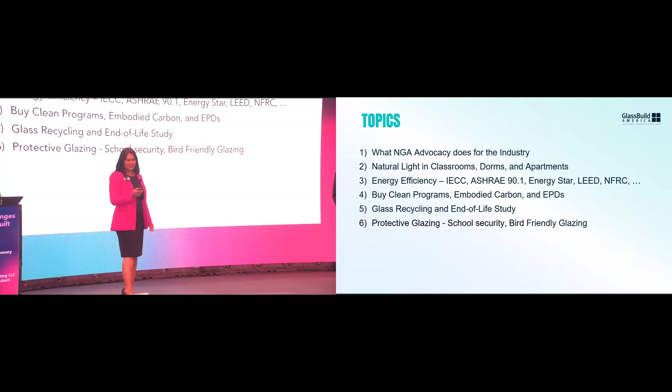I'm going to go over what NGA advocacy does for the industry. We're going to have Tom talk about natural lighting, classrooms, dorms and apartments, energy efficiency as it relates to the I-codes and all the different standards, buy clean programs, embodied carbon, EPDs. I'm going to have an action item for you all, so make sure you have your phones ready. We'll talk about glass recycling and end-of-life study, and then protective glazing and school security, bird-friendly glazing, and things like that. Then of course we'll talk about some big wins on daylighting as well as bird-friendly glazing.

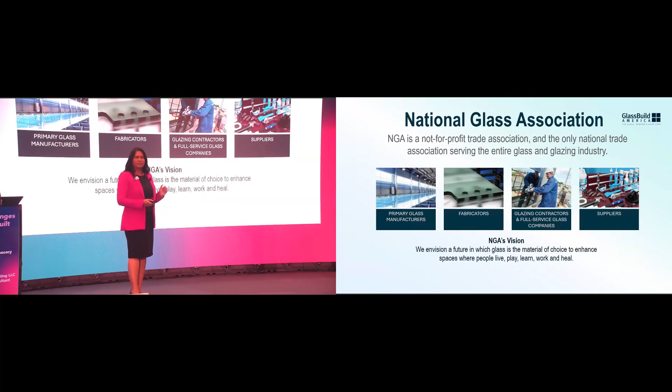So what does NGA advocacy do for the industry? First of all, National Glass Association—we're not just here for GlassBuild. We have a whole bunch of other things that we do all the time. We have the glass conferences, and we are about 1,900 member companies: primary flat glass manufacturers, fabricators, glazing contractors, installers, and suppliers. So our membership actually covers the entire supply chain. I like our vision statement: we envision a future in which glass is the material of choice to enhance spaces where we live, play, learn, work, and heal.

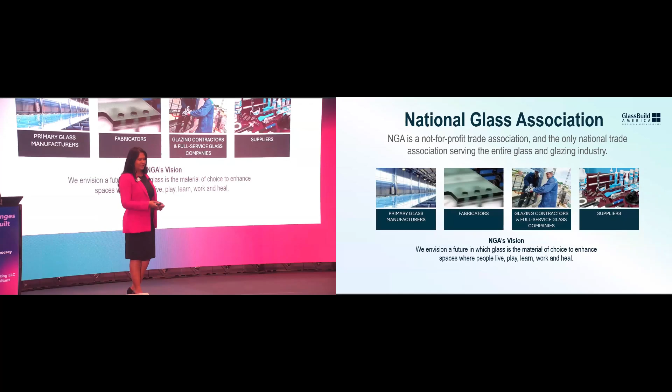So glass is being asked to do so much more than just protect us from the outside. Glass is there for us where it comes to security, hurricane, energy, flood, birds, bird-friendly, turtle-friendly, fire, acoustics, views, daylighting, recyclability, reusability, decorative, and of course safety. And then there's different types of glass. We have clear, tinted, laminated, vacuum. There's so many, of course you all know all of this.

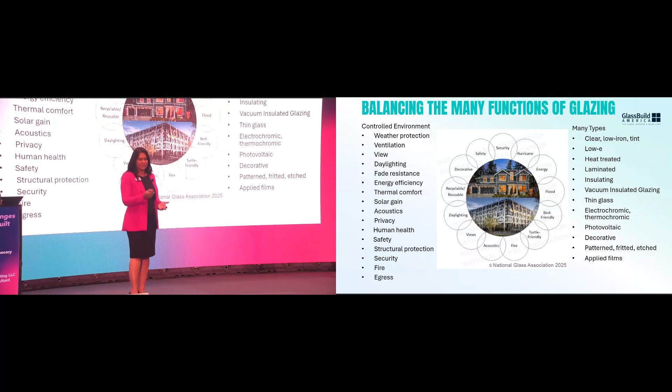But for us on the advocacy team it's like, how do we keep glass in buildings? Because we have a really amazing product, multifunctional at that too. So this is what NGA does. From the advocacy team, if there's a building code, a standard, certification body, association or organization, regulation or legislation that impacts or touches glass, we make sure we're trying to be involved. We make sure that we have a voice at the table, so that way we can ensure that we have a future for glass. We do so globally.

So I'm personally involved in the international standards organization, the ISO codes for glass and glazing, ASTM. Tom Culp is heavily involved in a lot of the energy side of things as well. So a lot of stuff going on all over the time.

221 years in our expertise in the glass and glazing industry. So it's not just like we're just here for today and then we're gone off to something else. We've been in the industry for quite some time and we want to make sure that we protect the industry for quite some time.

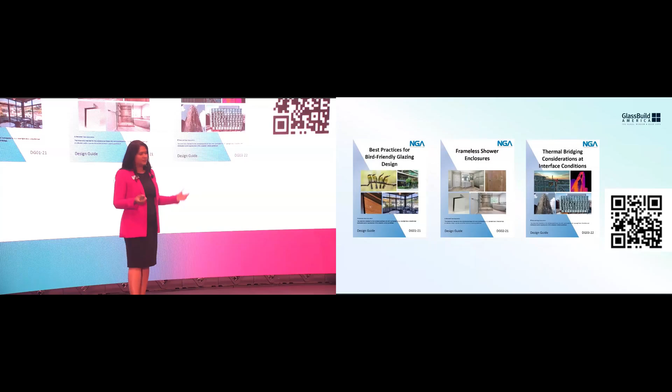We also have AIA presentations on there. If you are an AIA provider, we have the presentation with the speaker notes. We give it to you, you can take it as your own, because when you're speaking with architects, one of the things they don't necessarily want is you pushing your own company material. They would like something that's neutral. These are presentations that you can use.

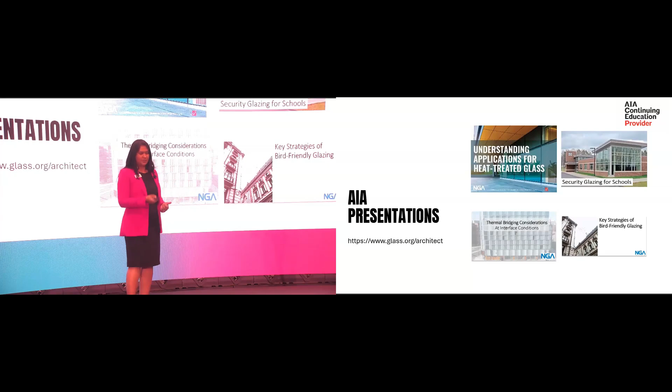We also have AIA credits for architectural record. We have an academy there that has many different presentations if architects need those as well.

And so then we also do a lot of advocacy. Glass and Glazing Advocacy Days, where we go to Capitol Hill. We talk about what we can do legislatively to help with glass. How do we keep glass in buildings legislatively? Whether that be energy efficiency, credits for different types of newer products, protective glazing, or school security and things like that. That's also something we have worked on.

On our website, lots of different webinars. This is actually going to be one of the webinars on there in about a month or so. We have quite a bit of them every third Thursday of every month. We either have residential trends that we talk about, quench your thirst for knowledge kind of technical talks, and of course the technical know-how on things like that.

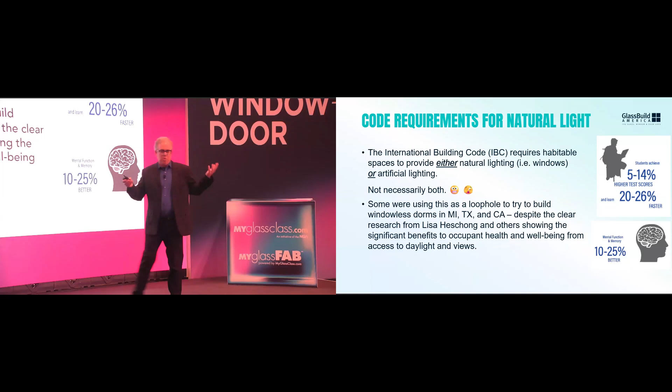The next thing we'll talk about is natural light in classrooms, dorms, residences, and apartments. So what are the code requirements for natural light? In the building code, the IBC, the International Building Code, which is used by all the states in the country as well as Canada and a number of other places, there's a provision that requires habitable spaces to provide either natural lighting, windows, or artificial lighting. But that's an either-or, not necessarily both, which is a little weird because in most cases you're going to have both. You need lighting at nighttime, wintertime, but you still want to have windows in there too.

But some were using this as a loophole. It doesn't say you have to have both, and so there was a loophole. You may have read about this in a lot of the trade press. There were people trying to build windowless dorms in Michigan, Texas, California. Munger Hall was one that was talked about in California. And think about that - that's just horrible, to have your kid trying to live, learn, work, grow as an adult in a space like that. Yet they were trying to do it.

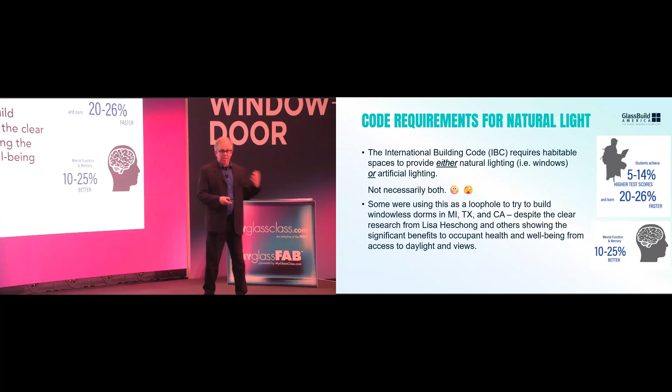And this is despite a lot of clear research. A partner of ours is Lisa Heschong, an academic who works on the importance of daylighting and view. She's done a bunch of seminal research showing that when you have access to light and view, students do better - they learn faster, they're healthier, they're more productive. So many clear benefits that we also highlighted in the last talk.

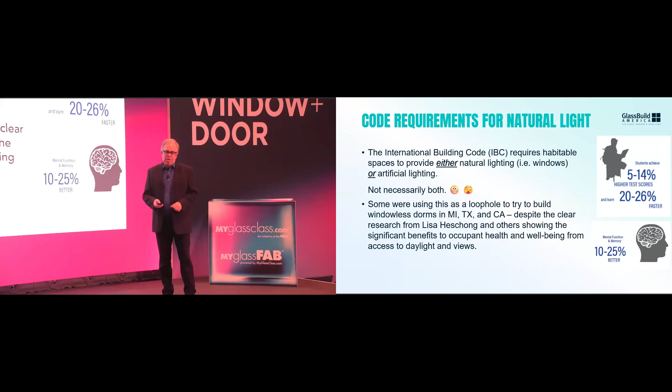So what we tried to do is through GICC, Glazing Industry Code Committee, an arm of NGA that addresses the codes, together with the Aluminum Extruders Council, we partnered and submitted a proposal that said no, we've got to stop this loophole, this is bad practice. Let's put in a requirement that makes it very clear in the code that you must provide both natural light and artificial light - electrical lighting in classrooms was our focus - as part of this concept that there's a basic right to light, as Lisa and others talk about it.

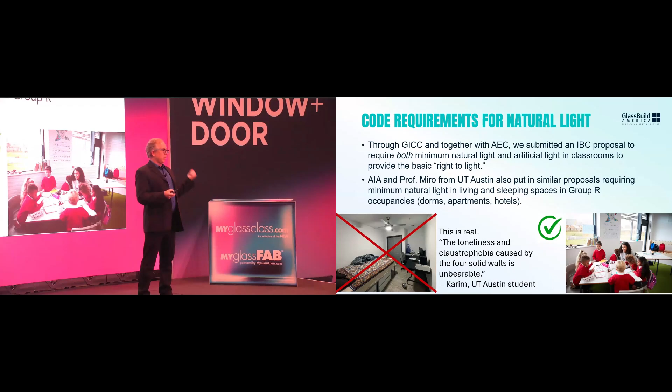We started working together with AIA, as well as Professor Miro, who's in architecture at UT Austin. They put in similar proposals doing the same thing for living and sleeping spaces and group R occupancies, which is dorms, as well as apartments and hotels.

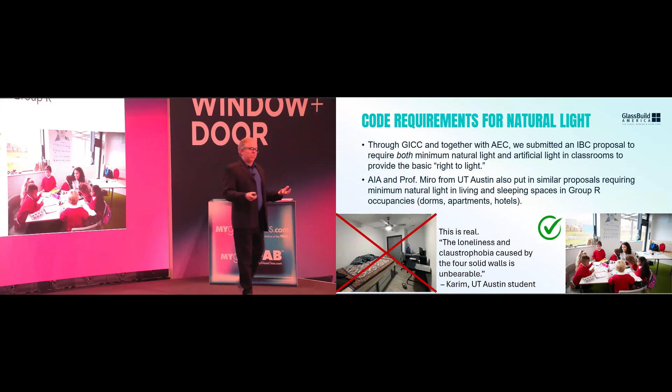The pictures speak 1,000 words. This is a real picture from Professor Miro of a dorm in UT Austin. Can you imagine? The quote says a lot, so I'm going to read it: the loneliness and claustrophobia caused by the 4 solid walls is unbearable. I can imagine that - that's the student living in that room. That's horrible. I have 2 kids, sophomores in college right now. I can't imagine, they're already under enough stress. To live in a space like that - horrible.

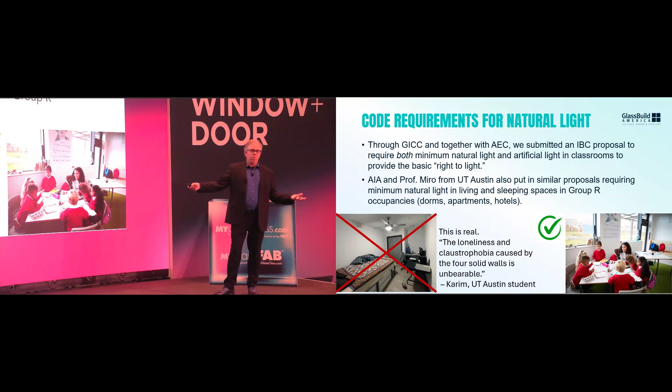So on the flip side, you can just visually see - this is an elementary school classroom, but it would be true of other classrooms all the way through higher education as well as dorm rooms. There is clearly a benefit there.

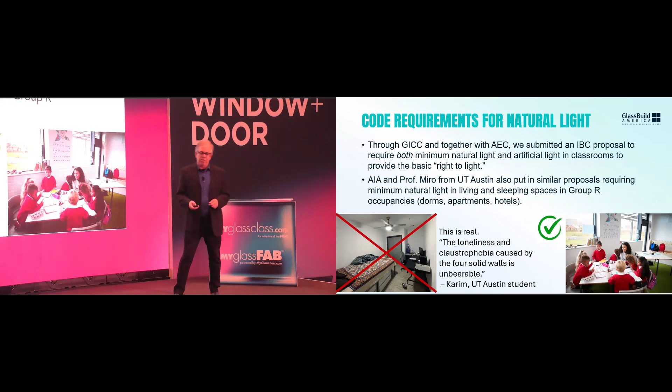So that's the big announcement - hopefully you already saw this on LinkedIn, we tried to make a big deal out of it, spread the word. We had a big win, a very big win for healthy buildings and students. Together, NGA, AEC, AIA, and Professor Miro successfully passed 2 proposals at the ICC Code Committee hearings on October 24th, just like a week and a half ago, to require natural light in schools, specifically in classrooms, dormitories, and apartments. So that's a big win.

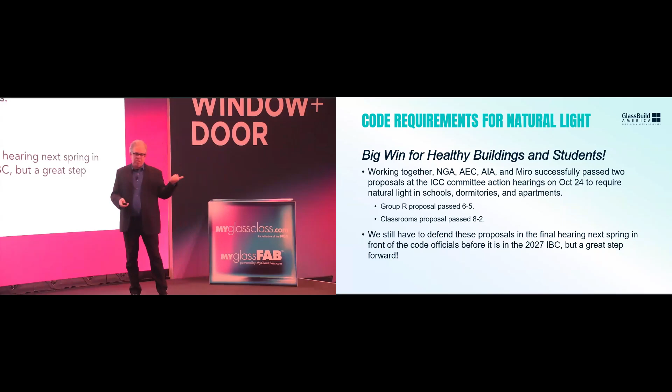Next topic - I'm going to jump into the other area I cover, which is energy efficiency. So this is things like IECC, ASHRAE 90.1, Energy Star, NFRC. We'll talk about what's going on in the world of energy efficiency.

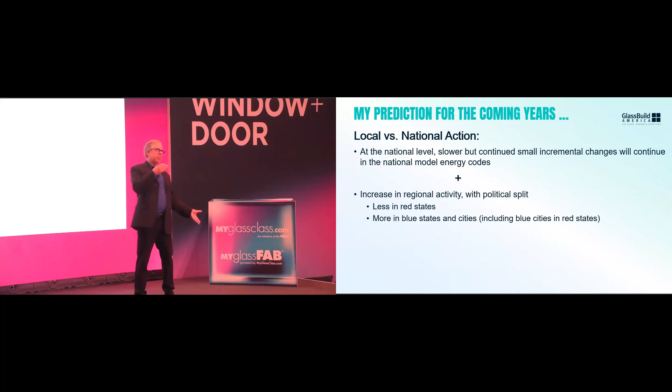I've been asked a lot, like, what's your prediction? We're living in a little bit of a chaotic world right now. What's happening? We have a different administration that views things very differently than the prior administration. What does that mean? I talked about this at BEC a little bit for those who were there, but I keep being asked about this, so I want to repeat a little bit.

What I see happening is you're going to see a difference in local versus national action. At the national level, we know, and we've seen already, there's going to be a slower but continual progression - things are not stopping completely, despite the current shutdown. But at the national level, we're going to see slow but continued small incremental changes in the model energy codes, and I'll talk a little bit about that.

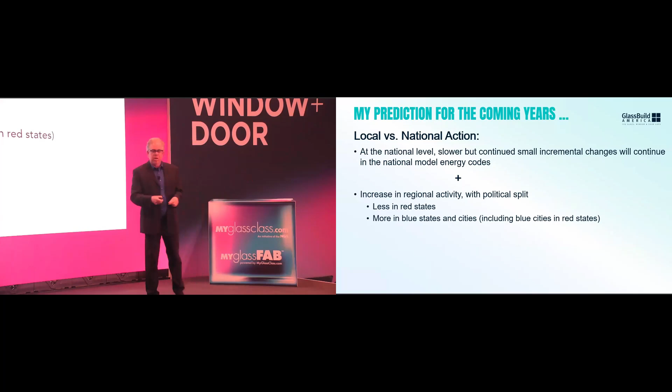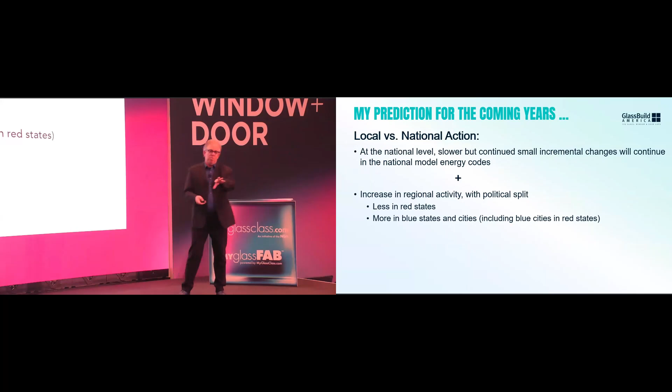But then the new part is, I think we're going to see this slowdown at the national level cause an increase in regional activity. We saw this last time in the 2016 to 2020 range, and I think we're going to see the same thing here. This is the one place I'm not political - NGA is not political - but this is one place where we will see a political split. We'll probably see less activity in red states, more in blue states, but also blue activity at the local level in blue cities in red states - Atlanta being an example, Austin, Dallas, places like that. So I'll give you some examples of what we see happening out there.

From a high level, what does this mean? It creates both opportunities and threats. We have to watch for attacks on window area in any of our codes - we always do that. But also, some of these local activities are creating new opportunities for high performance products. Vacuum glazing is becoming more mature - it's been there for a long time, but now it's expanding, becoming more widespread. Triple glazing, fourth surface low E, advanced spacers, advanced frames - we're seeing new opportunities created for those products. So what do I mean about that national level, slow, steady progression?

This is an example of ASHRAE 90.1, the main energy standard covering commercial buildings as well as residential buildings that are 4-story and higher. This is a chart on the left showing the progression of energy consumption of buildings built to the standard over time. You want that to go down.

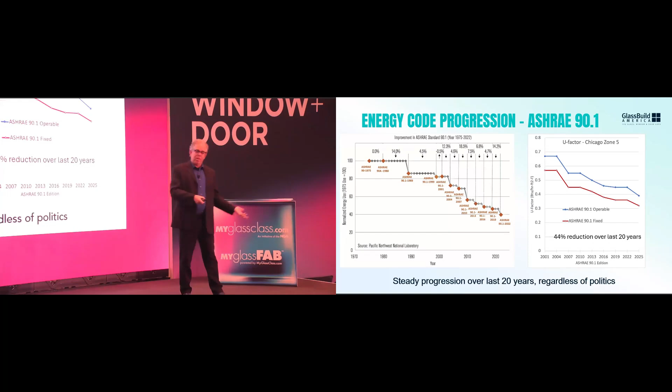This is a long time frame, going back to the 70s. From that start time to where we are today, the energy consumption of buildings built to the standard has been cut by more than half. That's a lot. Not many other industries can say they've done that much, but it's been done at a slow, steady pace, continual, and that's happened over multiple administrations, regardless of politics.

This is why I say, yes, we are all trapped in the news cycle this way and that way. I think we're going to keep seeing at the high level this slow, steady progression. Same thing is true on the windows specifically.

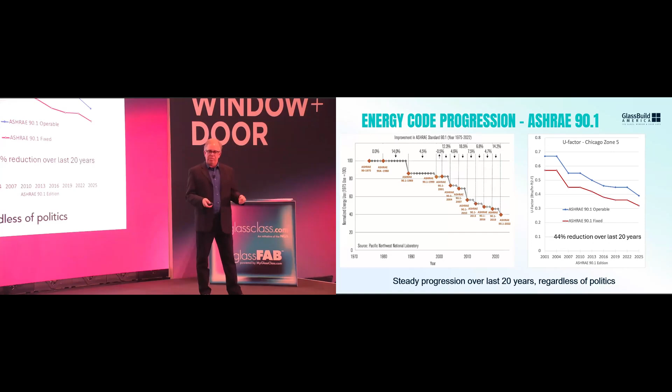The chart on the right is an example of U factors for commercial windows in Chicago Zone 5. You see over a 44% reduction in U factor over the last 20 years. But we've been able to show that it's cost effective and realistic and practical.

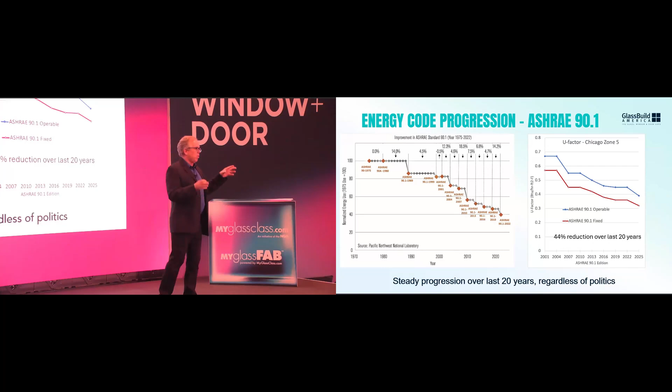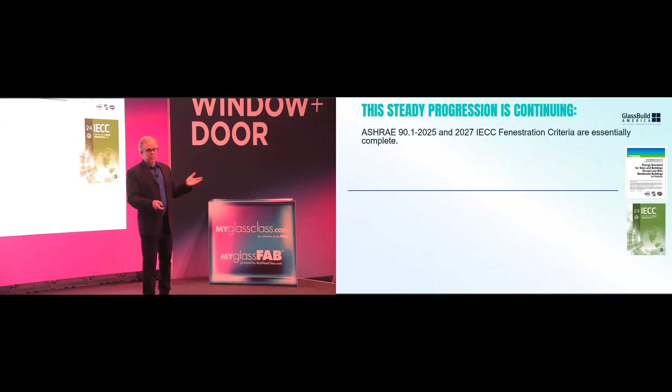Right now there are many people on the floor here showing products that meet these criteria, that maybe back in 2004 they'd say, oh, freak out a little bit, can we do that? Yes, we can do it. We are doing it. So my prediction will continue to see that at a high level, that steady progression continuing.

My world and Urmilla's world, we're already working on the future. We're working on the 2025 standard for ASHRAE 90.1, which has not been published yet, and the 2027 IECC, International Energy Conservation Code, but they're already done. The criteria are essentially already done. We worked with the committees to come up with criteria, it's a comprehensive change that's coming.

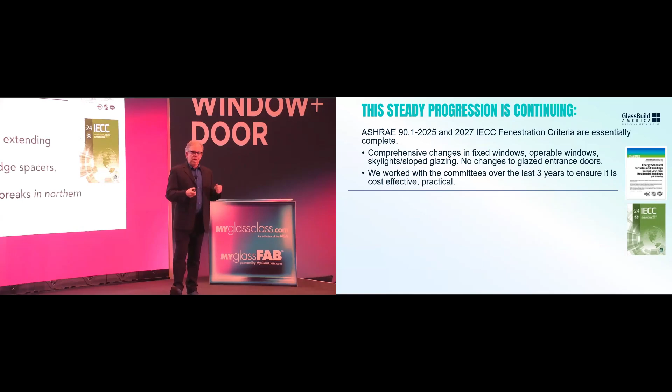I don't have the numbers for you, but contact me, I'm happy to provide them if you want to know what's coming. But to make sure they're cost-effective, practical, number one, there's no reduction in window area. We're seeing small incremental changes, like 3 to 13% in U factor. Not a big deal.

Solar heat gain is pretty much staying the same because it's already been optimized, higher in the north, lower in the south, with one exception where it's going a little lower to 0.23 solar heat gain in zone 0 through 2. That's the far south, up to about Dallas is the most north.

But we'll see more warm edge spacers, more thermally broken frames, more gas fill in all zones. In the northern zones, you're going to start to see more fourth surface low E, high performance thermal breaks. And far, far north, zone 7, 8, like northern Minnesota up into Alaska, triple glazing. But the main point is we have those products, we can do that, it's all good.

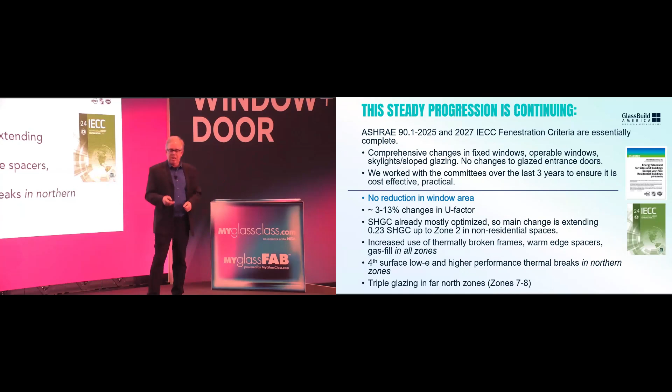A lot of words, I'll just make it very simple. There's a lot of rhetoric in the news about renewable energy. Is it going away? Is it advancing? Energy codes, it's still there.

It's increasing, which for us includes glass and PV and building integrated PV, BIPV. They've maintained and actually are increasing their renewable energy requirements embedded in some of the newer energy codes. So renewable energy from a PV standpoint will continue to increase.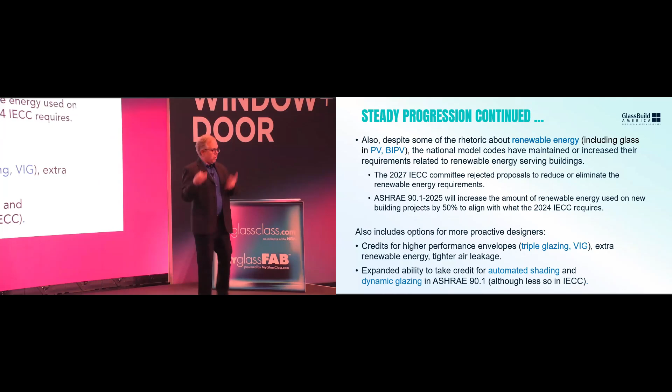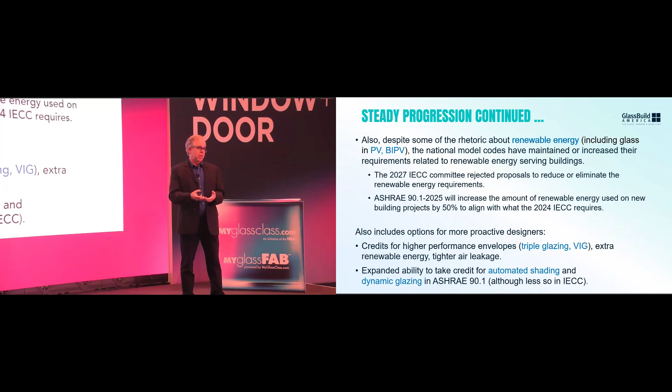There's also, for designers in the room, those who want to be more proactive and use higher performance products, you get credit for it. Both IECC and 90.1 have ways to get credit for higher performance envelopes, triple glazing, VIG, extra renewable energy, tighter air leakage, as well as new aspects allowing credit for automated shading or dynamic glazing. Let me know if you want details on any of that.

On the residential side, that's mainly dominated by the IECC, not ASHRAE. There we see the same thing. If you look in the north, going from 2021 to 2024, we pretty much have the 2027 numbers finalized, we think. It's not done yet, but there's been strong consensus around it. It's just small steps, you can see a 0.30 to a 0.28 to a 0.27 in the northern zones.

In the southern zones, some small changes in U factor, no big deal, but there is a change from 0.25 to 0.23 solar heat gain in the far south, nothing earth-shattering. So more warm edge spacers, inert gas fill, improved frames, fourth surface low E in the north. In the far south, you're going to see increased use of triple silver low E's and some of the newer triple silvers that give a little more solar control. But really nothing earth-shattering.

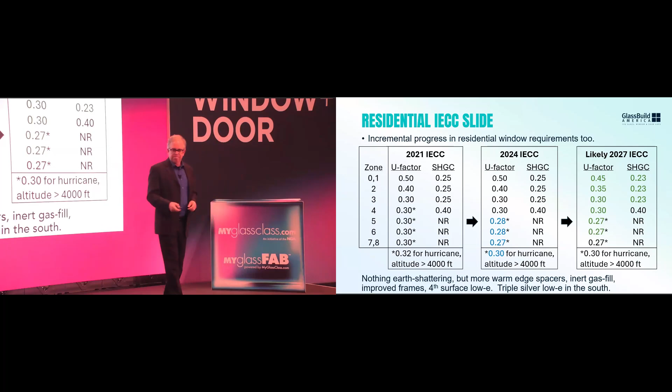What about Energy Star? Energy Star program version 7 is for residential windows, doors, and skylights, 3 stories and less, so homes and apartments. It's been in effect now for 2 years, and it's really quite aggressive, especially in the northern zone. The hope is that it's going to start to push triple glazing, surface coatings, things like that.

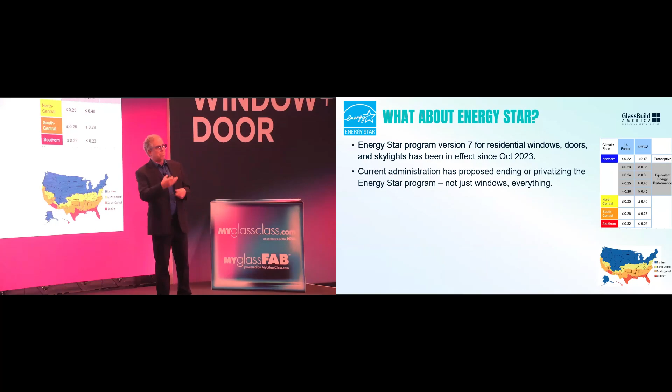But there's been a lot of news. The current administration proposed eliminating Energy Star, and not just the Windows program, but the whole thing—everything from refrigerators to thermostats to anything covered by Energy Star. They're trying to get rid of the whole program.

But the news is no. There was big pushback when that was announced, from industry, from building owners, builders, manufacturers. They said, whoa, whoa, whoa, we actually like this program. It's a public-private type thing. It's good for marketing products. Home builders use it to market Energy Star homes. Energy Star Buildings program is used for tax credits and benchmarking ordinances on the commercial side. So the overall program, they realized, okay, maybe that was a little too aggressive, and they backed off.

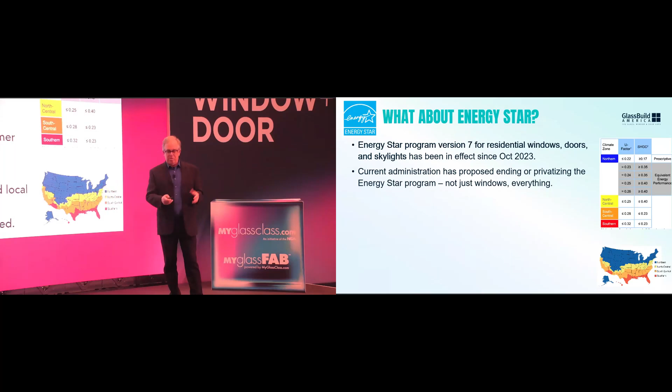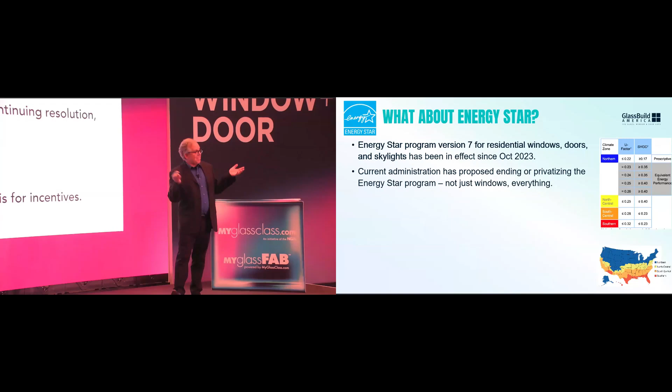Because of that pushback, both the House and the Senate Appropriations Committees have put a specific line item into their draft budgets to fully fund Energy Star. Now, of course, we got a shutdown. So what does that mean? We don't know. If no budget is approved, or if they just do a continuing resolution, it may not be canceled, but they may also not spend any money on it. So it could just sit there. It's called impoundment, which there's a big debate whether that's illegal or not.

But it's looking like it won't be canceled, so it's continuing like normal for now. Utility programs are still looking to Energy Star as a basis for incentives—Wisconsin is looking at that right now. So Energy Star is still there, but it has created a lot of confusion in the marketplace.

I just wanted to briefly mention PAWS. PAWS is a Partnership for Advanced Window Solutions. It's another public-private cooperation partnership, kind of like Energy Star. This is specifically for windows—DOE, national labs, utilities, and then industry. So I'm there along with some of our members, representing the glass industry on how to voluntarily promote the next level of performance, high performance windows.

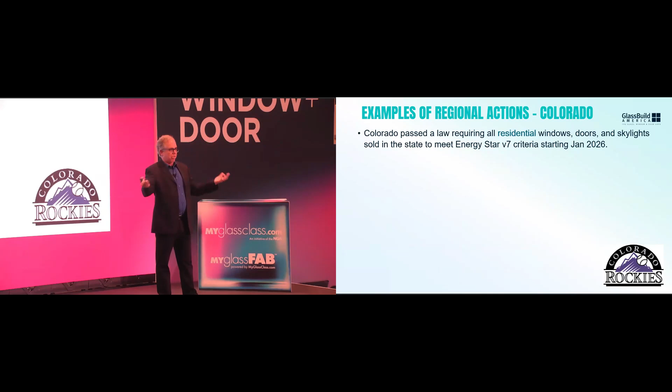One is Colorado. Colorado passed a law a little while ago that addresses all residential windows, doors, and skylights sold or offered for sale in the state—they must meet Energy Star version 7. That's a big step, putting the onus on the manufacturers, not the person occupying the home. If you violate a building code, it's the building occupant that's technically at fault—of course they'll point fingers at whoever built the home or the architect, but technically the responsibility is on the building owner. With something like this, the responsibility is on the person selling the product, whoever's selling that window. And so it really raises the level.

And there was some question.

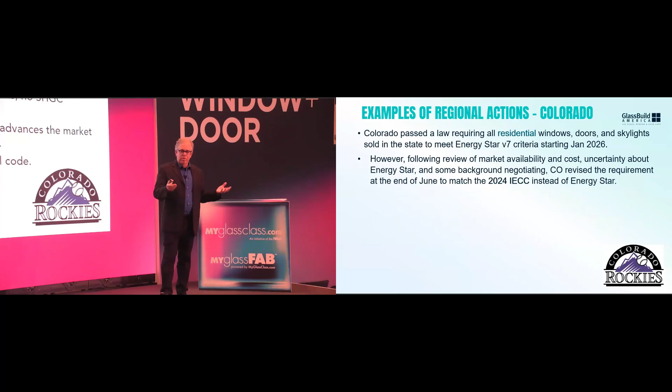Energy Star version 7 in Colorado is quite aggressive. It will really push triple glazing, but there was some pushback about affordability and cost, and confusion about Energy Star fed into it, so they backed off a little. They backed off to the 2024 IECC instead of Energy Star. It's nothing crazy, but it's still an improvement: a 0.30 U factor for windows and doors, no solar heat gain requirement in Colorado. That's the northern zone, and it's a compromise that gets more people on board.

Colorado's unique with the altitude, so there was discussion about what to do for higher altitudes - do we give an additional allowance? Right now they're just staying out of that game, with a 0.30 U factor for the entire state. But there are more and more manufacturers doing high altitude argon now. It used to be said you can't do a gas fill or argon at high altitudes, but you can, and there are companies here showing you how to do it. There are different ways - pre-equalization of the IG unit seems to be one of them. There are people here you can talk to and learn more about that.

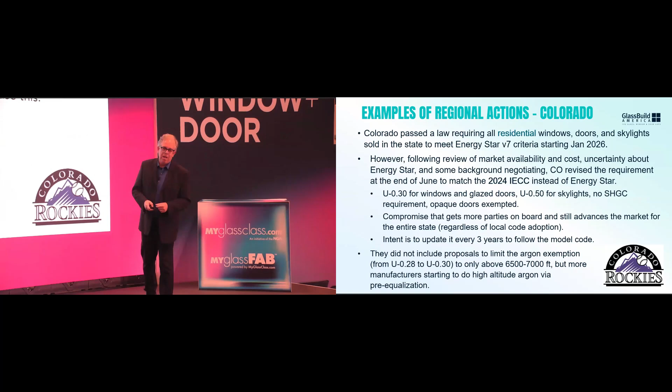Also in Colorado, they have a model low energy and carbon code. It starts July of next year. Basically it's the modern energy code, but adds on stuff about extra solar - glass going into PV, as well as electric vehicles, electrification, stuff that really doesn't involve us. But that's an example where Colorado said, all right, we're not going to wait on the federal government, we're going to move a little faster on our own.

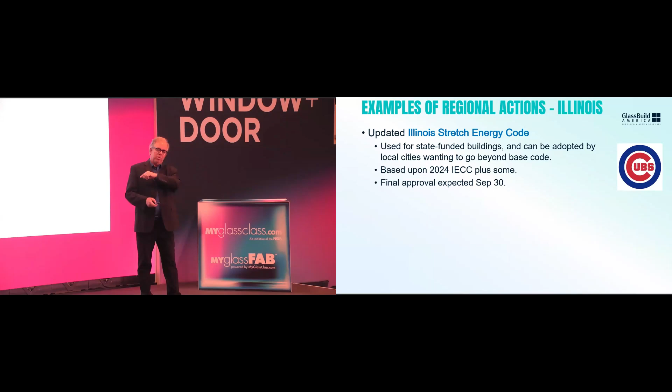Illinois just recently updated their Illinois stretch code. This is used for state-funded buildings, but local cities can adopt it as well, so that could be a small proactive town or it could be Chicago - we don't know yet, we'll see. It's based on the IECC, the most recent version, plus some. Final approval was expected September 30th, and they did do that - it has been approved.

So for commercial windows, it's a 0.28 U factor fixed, 0.32 operable. That's a notch beyond ASHRAE 90.1, so it's more advanced but still achievable and practical. It's going to push some higher performance technologies. For residential, they're looking at about a 0.27 U factor - again, very reasonable, can be done. It's just pushing the higher performance products.

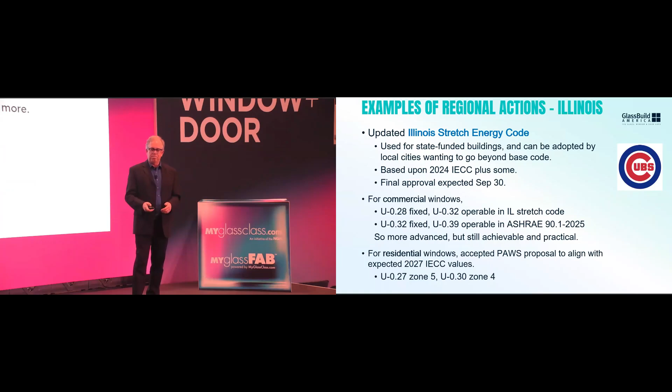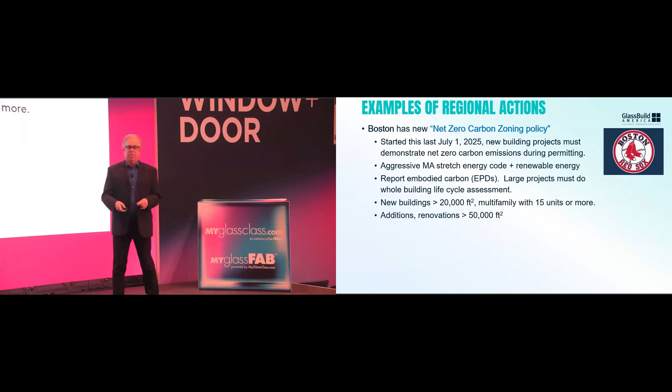Boston, going up there, has the new net zero carbon zoning policy. This started in July of this year, so it's in place now. All new building projects now have to look at carbon as well as energy, so they have to report embodied carbon, EPDs - Urmilla is going to talk a little bit about that. Large projects have to do whole building life cycle assessment, plus they have to meet a very aggressive energy code, the most aggressive in the country. There's a lot going on there that's way beyond what's happening at the national or federal level. Boston's probably one of the examples of really regional action going beyond the national level.

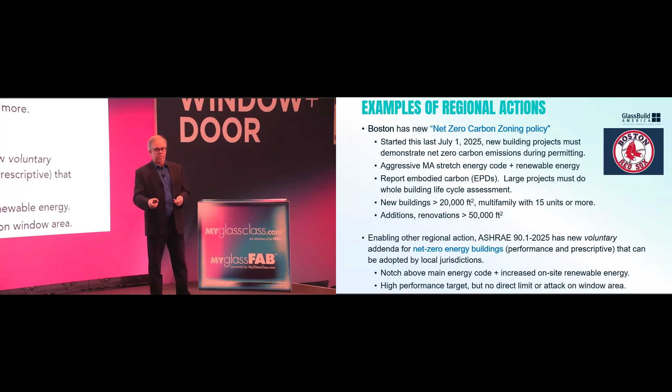And then this is not Boston, this is ASHRAE 90.1. I wanted to note that's kind of the national standard, but to help cities like Boston, they said let's try and put a little uniformity around this. So they created a net zero energy building voluntary appendix - it's voluntary, so a city like Boston, if they want to do it, can just say okay, I'm going to do it this way. It's a notch above the main energy code, uses a lot more increased on-site renewable energy. One thing we looked at was making sure they didn't attack window area - they didn't, so we made sure of that. So it's a high performance target, going to be hard to do, but it's not necessarily an attack on windows.

Now all those were examples of certain states or locations jumping ahead of what's happening at the federal or national level, wanting to be more aggressive. It can also work the other way, and you might be surprised that I have California up there. But California is taking a pause. They have a pretty good, strong energy code already, but for this upcoming cycle over the next couple of years, they said we're not going to make big changes - they're really just doing small tweaks.

We're going to do one small tweak in Windows. That's really no big deal.

Probably the bigger news is their response to what Karen spoke about regarding wildfires. After the Palisades fire decimated a lot of residential homes in California, they put a pause on what are known as reach codes. No residential communities can implement these reach codes for the next 6 years, because they want to speed development and rebuilding of those residential areas. Residential only, but it's interesting. California's taken, not a step back, but a pause, is the way I'd describe it.

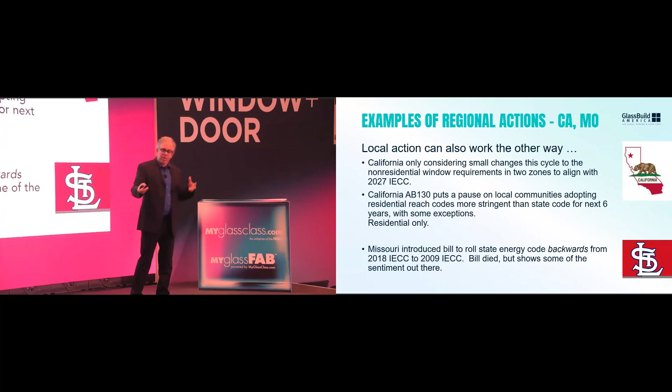Now a step back would be Missouri. Missouri introduced bills to roll the energy codes backwards, and this has never happened before. This is very rare—from the 2018 code back to the 2009 code. And that's like, what? We're going to go back to double pane clear glass, no low-E? It's silly. It looks easy on paper, but in reality, why would we do that? Ultimately they came to their senses and the bill died, it didn't go anywhere. But I wanted to use that as an example that this sentiment of regional activity can go both directions. So there is some sentiment out there.

Last thing before I hand it back to Urmilla, NFRC. NFRC is the gold standard for calculating U factor, SHGC, VT, and all the standards and energy codes reference it. It says you have to use those numbers—it doesn't say you have to do the full label, but you have to have U, SHGC, and VT numbers calculated in accordance with NFRC procedures by an independent lab. For residential products, the easiest way to do that is get the label, so everyone's familiar with it. You see that everywhere on residential windows—the NFRC label—and that is the gold standard.

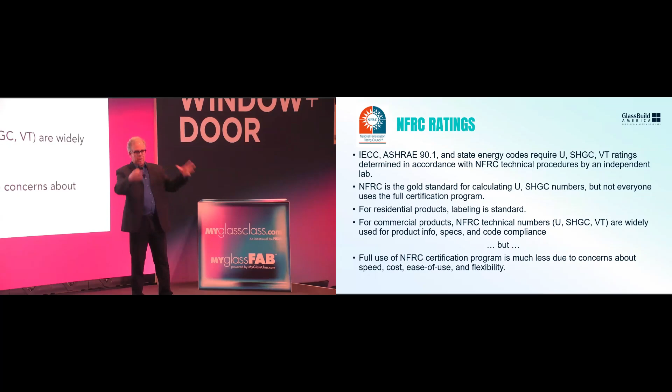For commercial products, NFRC numbers are used quite regularly for product information, specifications, and code compliance. But the full use of the NFRC program, which is either a label or a label certificate, has been used less because of concerns about speed, cost, and flexibility. They know that, so they've been working on it on both the residential and commercial side.

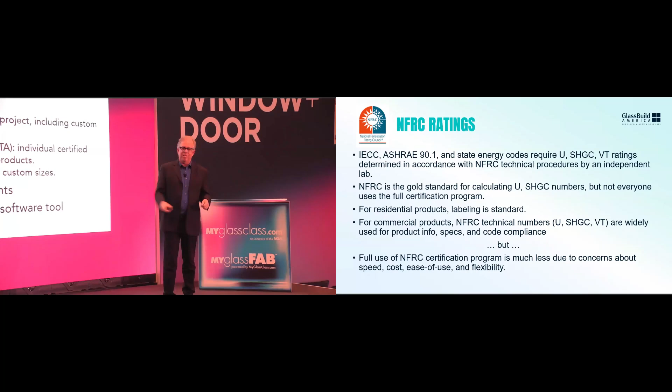On the residential side, they have a new program called LEAF. It's a horrible acronym—linear, blah blah blah, I can't even remember. But it gives a little more flexibility in the residential rating program, like where a residential manufacturer, if they want to swap out the type of glass, can very quickly recalculate their label numbers.

On the commercial side, staff has been working with industry for the last 6+ years to revamp their program to make it more flexible. There are two paths here for architects who tend to work on more customized, especially large, projects. You can do a custom product path where you just have one lab certify every product on your building, and get one certificate for the whole building. That's something architects working on a more comprehensive big project may be interested in. Or there's a product path where, more from a manufacturer perspective, they can combine this frame and very quickly combine it with different glazing options and spit out in real time a new certificate for that product, with the rating at standard size or at actual size. That's a big debate—you can ask me about it if you want. Your U factor at the real size is different than the NFRC size. Ask me if you want more information about that.

So they've been working on that, and they're done—the staff has been working on the implementation and it is now in place. All new product certifications have to start using that program now. For manufacturers in the room, if you're a spacer or glass manufacturer with products in the NFRC database, don't worry about it—it's already been transferred over to the new program. For framing manufacturers, you have 6 months to do it without any retesting, which is money.

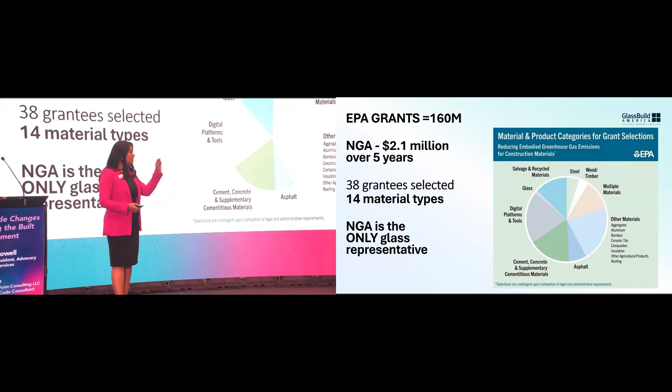So last year, we were all excited. A year ago, we were so excited because NGA was selected for an EPA grant to help with industry on embodied carbon and all of these things. NGA was the only glass representative on there, so we had high hopes.

We had 4 different projects that we were going to do with this EPA funding. One was for the primary flat glass LCI data aggregation. We were going to work on an EPD generator tool for processed glass, and EPD development assistance for glass fabricators, because sometimes they're being asked for it, sometimes they're not. It's very expensive to get, but nobody knows who's going to ask and when, and it takes a lot of time. And then of course we had an end-of-life LCA data collection on architectural glass recycling.

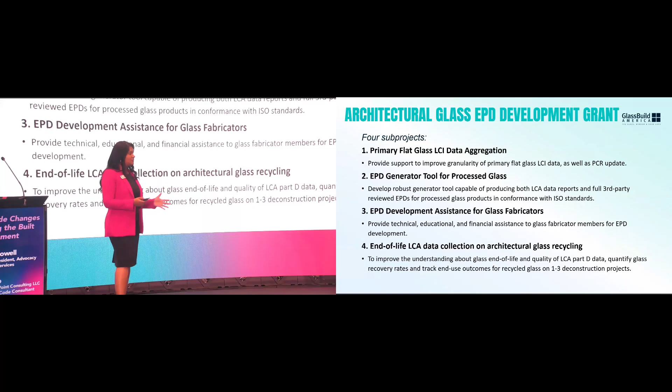This was going to address what happens after the glass comes out of a building, what do we do with that. We'll talk a little bit about that afterwards. So last year, really excited, had all of this money, we were gonna go rock the world and change the glass and glazing industry.

Then January 20th happened, and President Trump went ahead and had an executive order to pause disbursements of funds. We were a week late on getting our funding. Our EPA person was really trying to get us up and going, but we couldn't get all of the information there to where we were fully funded.

So then by spring of 2025, hadn't heard anything yet, but our exact number was on one of the DOGE lists, that it was one of the ones going to be cut. And then finally, July of 2025 is when the One Big Beautiful Bill Act officially canceled all unobligated funds for the low embodied carbon construction materials program, both for EPA as well as GSA, including our funding.

So what do we do with those 4 projects that we're all excited about? Still got to get them done, right?

So this is the status of where we are with the product category rules. This is the flat glass product category rule, which expired back on September 30th. No more flat glass EPDs can be worked on currently right now because there isn't a PCR that is now updated.

Flat glass EPD average - this is something the NGA had worked on with the forming committee. This expired back in December 20th of 2024. This is something they were not going to be updating. However, part of the funding, we were going to have some data for that.

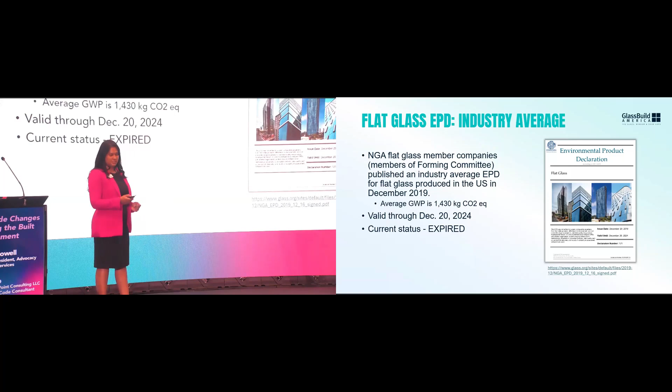Processed glass PCR is also expired. This is all the fabricated products - laminating, insulating, etched glass, everything, any process that happens to a glass. This PCR has been expired since June of 2024.

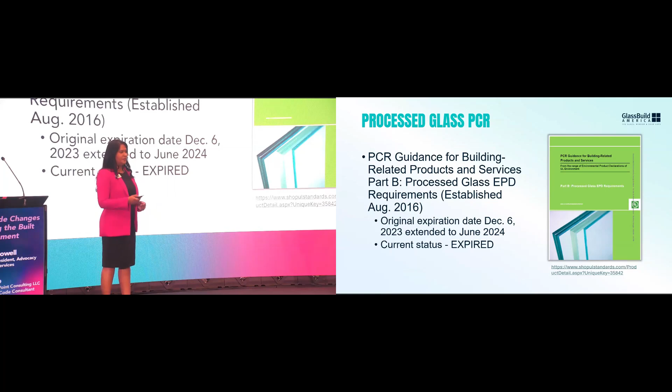And then this is the one that's actually still available: the Fenestration Assemblies PCR, formerly the Windows PCR. This one is active until 2028.

So one of the questions we're working on right now and trying to figure out is how do we move forward knowing that here are all of our documents for embodied carbon. We have states now picking up more of this - they're asking for Buy Clean, they're asking for numbers, they're asking for EPDs, they're asking for embodied carbon numbers. What do we do as an industry?

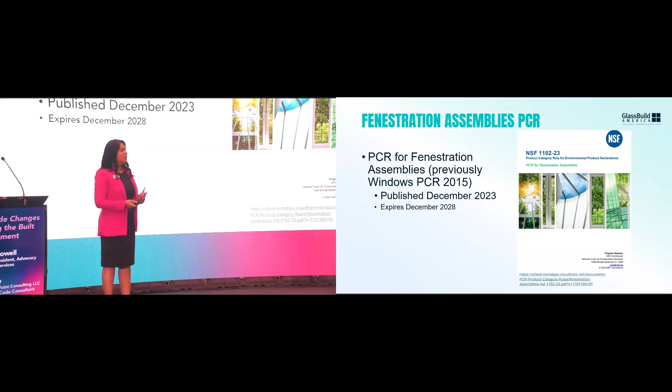Tom kind of talked through some of these already about who's asking for these. Architects are asking for these as well - you have architects, specifiers, general contractors. So many of them are looking for last minute requests for them to bid jobs.

For some of the Buy Clean states, you need to have an EPD. This is not something you can do last minute - this takes months to do. So it's not something we can just happen to go on.

And of course, with version 5 of LEED, which Tom talked a little bit about as well, this is also there. In order to get a full point - level 1 points are providing company and product specific EPDs. Higher level 2 points are awarded for products showing 20% reduction in embodied carbon compared to a baseline. So it needs to be a baseline, which is your average, and then show 20% below that to get different points.

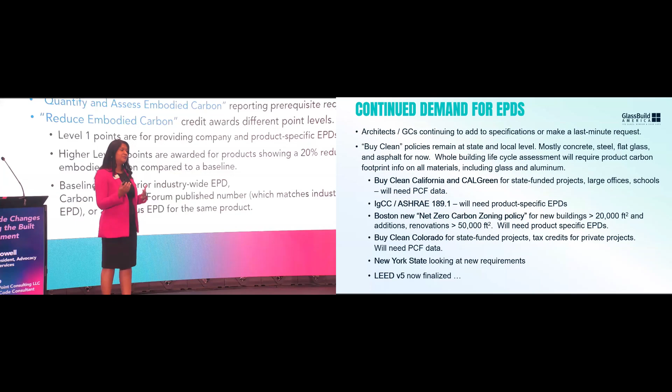As an industry, there's some information that we need to get out there, and some information we need from you. One of the things we're working on is with True North Collective, our consultants asking the industry what do you want, what do we need to do, how do we move forward knowing we don't have the EPA funding. Do we move forward with the EPD generator? Do we move forward with EPDs or LCI data? Is all of this necessary? Do we need to do both PCR updates or not?

So please, if you are being asked for environmental product declarations, or anything about PCRs, please take the survey. It's a live survey that gives us feedback, because we are an industry organization, an association of member companies. We also have Kristen Morehouse from True North here in the audience. Ask her questions, or allow her to ask you questions, so we can have some really good data on how to move forward with this.

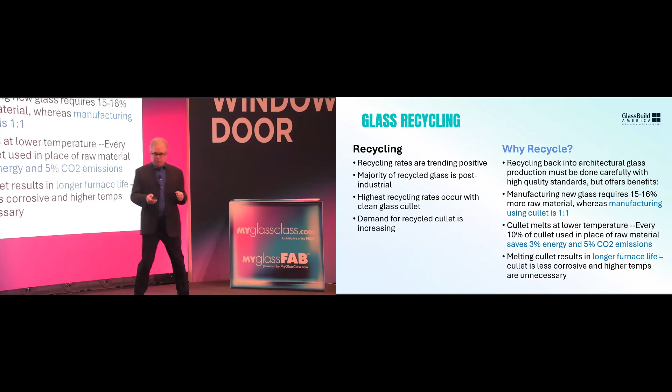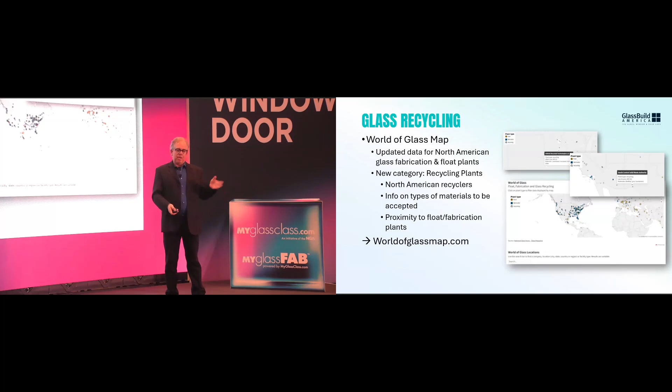Then we wanted to also look at end of life and circularity - what happens at the end. Recycling is one word, but there's really different ways of doing it, different uses. How do you recover it off a real project? So we have a project together between NGA and the Aluminum Extruders Council doing a real life deconstruction - taking down a building, looking at how much aluminum, how much glass is recovered, where does it go, what's the process. It's similar to studies done in Europe, but now we want to repeat that in the US. So basically it's everything beyond your traditional cradle to gate EPD.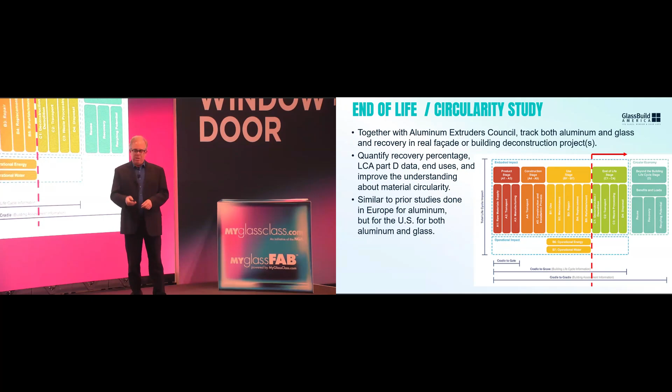And we have a building - this is our first building. It's actually a parking garage, but a big one with a lot of glass, aluminum, and other materials on it. This is in Rochester, Minnesota, so some of you may be able to guess who owns it, but they're tearing it down.

We're working together with Infinite Recycled Technologies, who's here somewhere - Stanley's right there, thank you Stanley. And we're working with Sophie Pennetier, who many of you may know - she's our third-party LCA expert working on this, and it's underway. I happen to live only an hour away from there, so I've been able to sneak over and take pictures. They're taking pretty much all the glass off, so we're going to be tracking the recovery and the lessons learned.

Next will be looking at aluminum and some of the other materials. Sophie will be providing a report in the spring, most likely at BEC or GFAB. We'll know more in the spring, and we're also looking at some other future sites to look at different ways that glass can be removed and recovered.

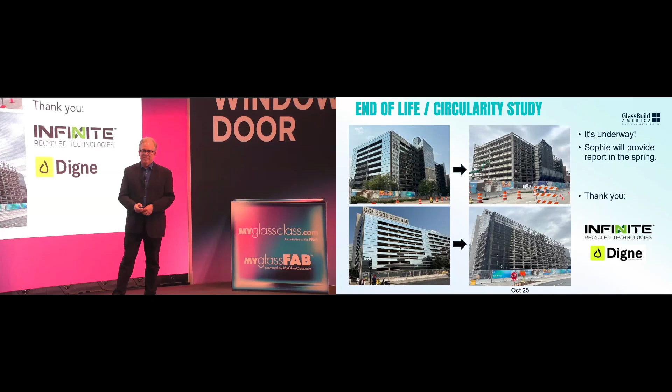A big thank you to Infinite as well as Digne for doing this, go check out their booth at 2050. For any of the exhibitors here, once you break down, Infinite will be recycling the glass that's in the booth. This is one of their things they're trying to do. We're really excited that the glass used here will actually be recycled, not go into the landfill. Thank you, Infinite Glass.

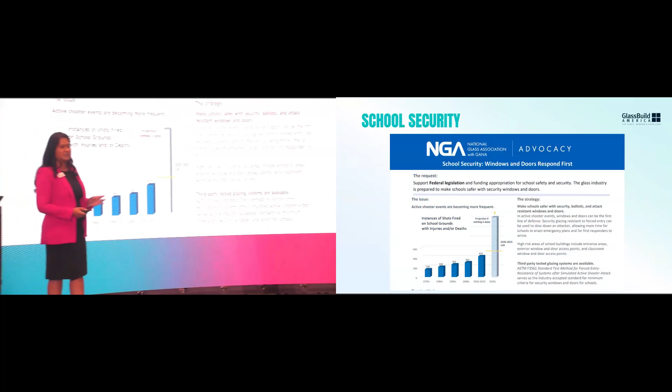Last section, protective glazing. Some of you were probably here for the last session, but just real fast on the code aspect of school security.

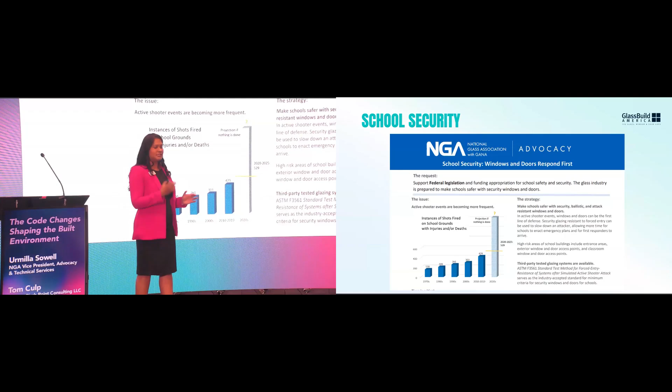We're trying to make sure we get something in legislation, because a couple of weeks ago at the codes, it did not go so well.

The average length of an active shooter event is 8 minutes. The shortest is 90 seconds. If they cannot get into the building, it's less. Response time for first responders averages about 3 minutes. This is something we can do something about. The glass and glazing industry can harden a building and help buy time before an attacker can get inside.

One of the things that frustrates me, and many of you as well, is that there are no building codes for school security. There's no security or forced entry requirement in the codes itself. GICC with NGA put together a proposal for school security for the building codes, but that did not work out. What was hopeful and helpful is that some building officials and consultants who were there said do not give up on this.

This is something that needs to happen. Some advice we got was to try to see if this is a life safety issue instead of introducing security to the building codes. So the consultants, staff, and industry will be working towards what that looks like for the next edition of the codes.

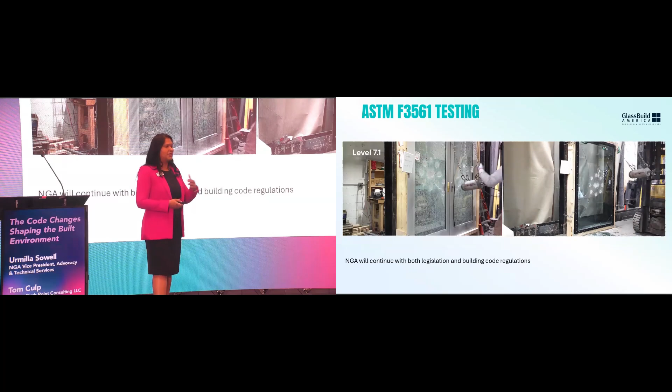This is a door that has already been shot at, and now you have the impactor. That door did not open up. Here's your window. So it buys time before that assailant is able to get into that building or school. It allows people the opportunity to hide and do what they need to protect themselves inside a school or office building.

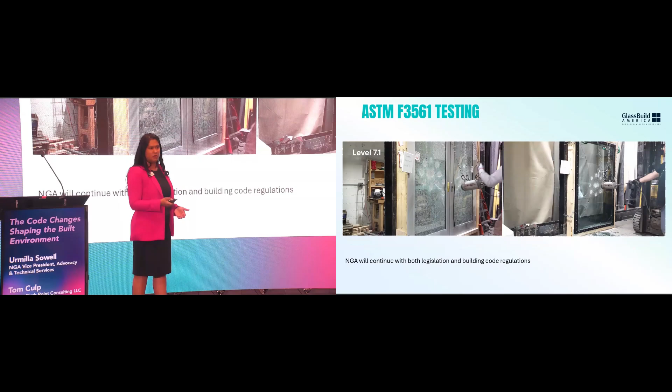Some solutions we talked about before: security glazing can slow down an attacker. It allows personnel to see the impending danger when you have views at the front end of a building, to see what's happening and start lockdown procedures. It can be designed with forced entry or bullet resistance, but it looks just like regular glass - just like everything that's there right now. No one's going to know what's going on.

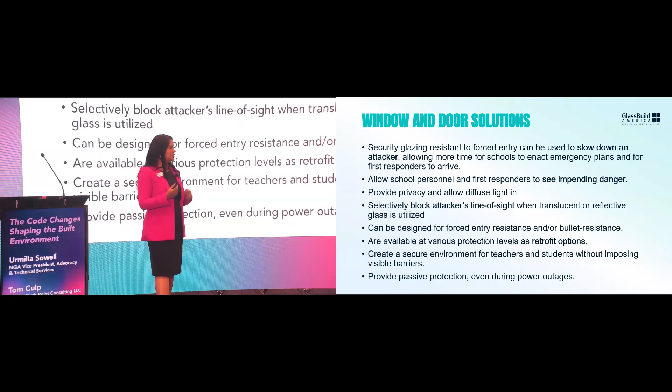And it can provide passive protection even during power outages. Sometimes there are situations where a power outage happens and doors automatically open. This is something that still happens.

Switching to bird friendly, again, we kind of talked a little bit about that in the last session, but this is just to let you know on the code side and also on the standard side. As industry, we did work on a bird friendly glazing design guide.

There's lots of requirements in there. I mentioned already that we have a database on the members only side that shows every single state, every area, some cities have a lights out program or different things. So you have different areas with different types of legislation or requirements on bird friendly. All of that's on there. Different places require different things, different materials as well.

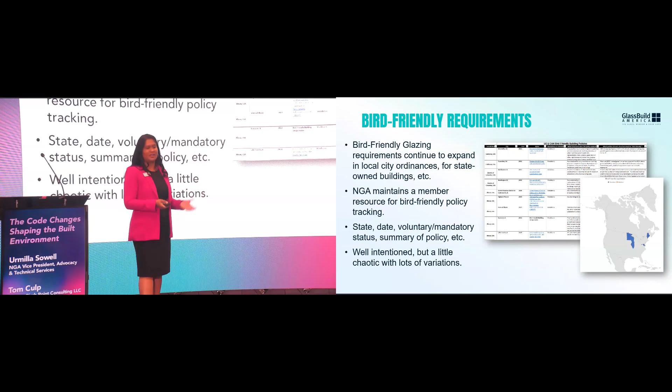So here's the legislation that kind of helps. I'm going to have Tom talk through this big win at ASHRAE. Yeah, so there's a lot of variation. So far, the bird-friendly requirements have been implemented as really scattershot ordinances. San Francisco's different than Chicago, different than New York.

So to try and promote a little more uniformity, we decided, let's take what we recommend from our design guide that NGA's members developed and put that in the green code. The green code, there were two that were merged, so it goes under two names: ASHRAE 189.1, and that becomes the International Green Construction Code. So we put in a proposal that, based on the NGA design guide, specified where it's required.

It's basically 90% of the vertical fenestration, glass spandrel, and skylights below 100 feet. But it also has language talking about glazed corners, skywalks, glass railings, vegetated roofs, roof patios, things like that. And then where it's required, what's required - this is a prescriptive standard, so it has language that includes all the different technologies: opaque, translucent, etched, as well as UV markers.

And then it's essentially the 2x2 rule, if you know that, which is markers spaced every 2 inches. But it has flexibility and wording so that there's a new way you can do dots, lines, random patterns that a certain sphere or circle can fit in. So it's meant to be flexible but provide that protection for birds.

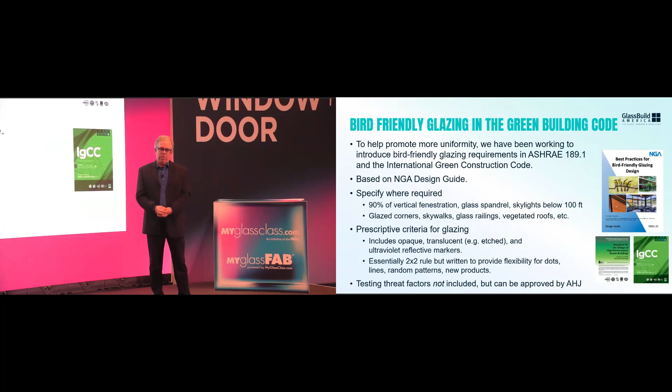And so then the good news, if you go ahead and click to the next one, is success. They were very welcoming of this. The committee supported this unanimously through 2 public reviews. It's now being processed for publication, probably at the end of this month. So it will be published as a separate addendum, and then that will automatically be incorporated into the next full book of ASHRAE 189 and the 2027 Green Construction Code.

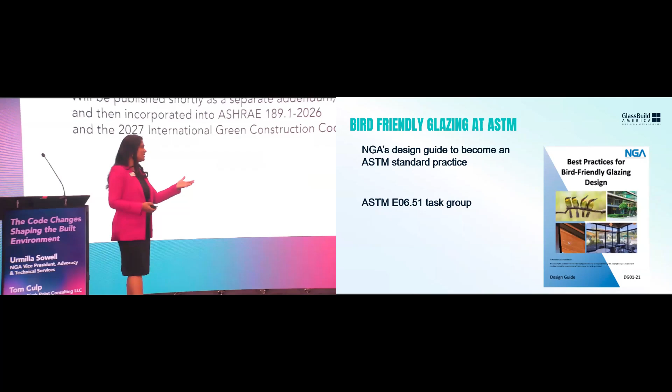So it's another example of taking advocacy, or something our members wanted us to do - we bring it to them, we worked with the committees, and now it's going to be real life, where cities and states can adopt this around the country. Most importantly, it's not chaotic from different state to different state. So here's something that's harmonized, so that as there are different projects, you have everything that's just one.

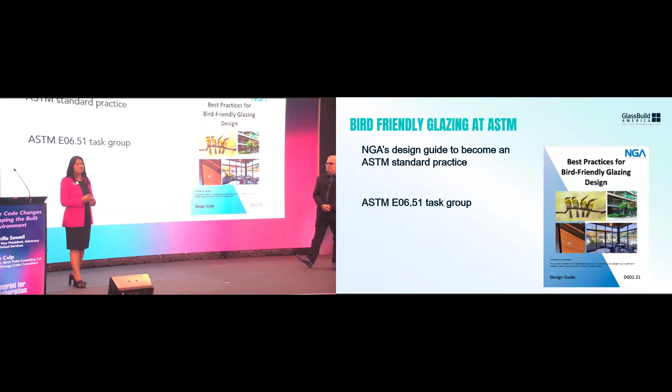One of the last things I want to mention is that the design guide, because there hasn't been a standard at ASTM - do you use the field test, or the tunnel test? There has been that debate for at least a good 12 years. At ASTM, one of the things our members decided was, hey, we have this document, can we make a practice, an ASTM International Practice Guide at ASTM, so now we have a standard out there to use. So this is a new task group we're working on at ASTM E06.51 task group.

So I think that's what we have, Tom.